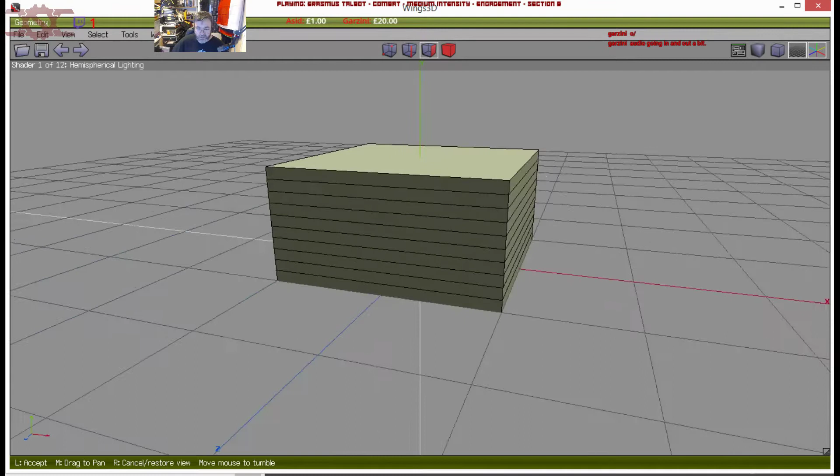Now, another thing to think of is, especially if you're using solid objects like this—if we undo those layers, I go back into the model and make it back into a cube.

So that's back into being a cube. For example, if you're wanting to use this basic cube model, you can make a 6-sided dice. To do that, make sure your block is solid, with no overhangs or edges on it. Something like a poker die is sharp-edged, sharp-cornered, and you don't have to make any modifications.

All you need to do is make your dice numbers. I'll show you that very quickly here. We'll just do a few cuts, then do circular eyes, and extrude that down. There you go - a very simple base for a die.

Now you can make it a little bit tidier. For the sake of this demonstration, I'll do this very quickly and explain what I'm doing in a second. So what you've got there is a tessellated and triangulated shape that will 3D print easily. Your hole is vertical, so you're okay with the way it prints.

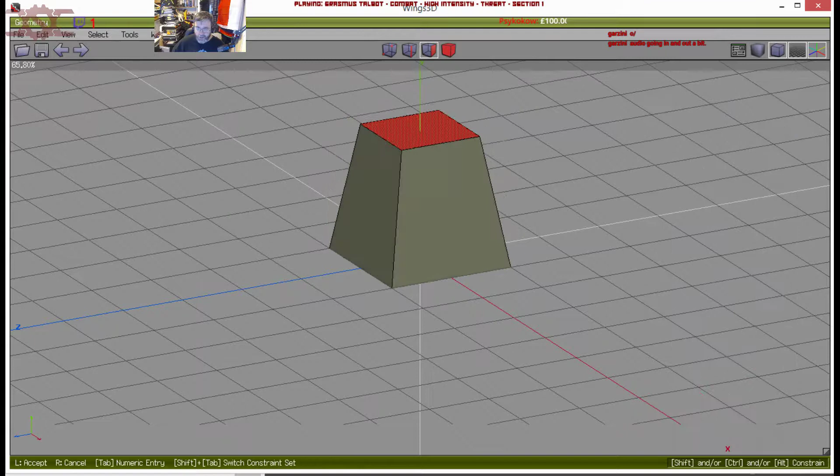So essentially what you're looking for is something that's going to print easily, with gravity helping it stick to the plates. If we have a look at easy to print shapes - if I scale that, that's easy to print because that shape is completely tapered, so each stack is smaller than the one below it.

However, that would be problematic because each layer actually sticks out a little over the edge of the first layer. So if I chop that up into sample layers, as you can see, you've got an overhang there. That's not exactly how it would print, because generally you'd get a stepped pyramid more than anything.

So it would go at right angles, because it can't print slants - you've got 0.2 millimeters, which is a very fine resolution. Because your splodgy layer is about 0.2 millimeters, the resolution of your actual print head movement is less than that, down to 0.01 millimeters. So you can overlay, meaning within each of these you'd have a very small overlap on each layer.

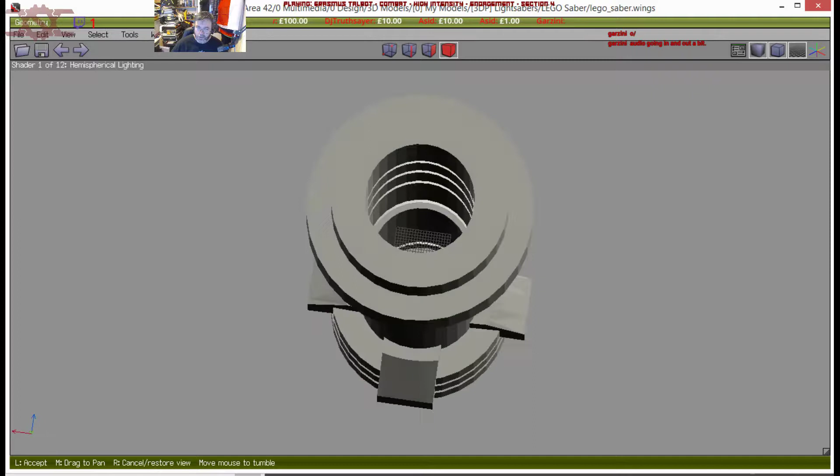I could load in a model I already have and show you how it works. So let's do that. Let's have a look at lightsabers, Lego saber. Okay, so that is the Lego lightsaber. Let me render that fully so you can see it.

That is rendered into many individual parts, so each of those is easy enough to print on its own. We have this part here, which is a hollow torus, a hollow cylinder - that'll print on its own. You then have a filled-in cylinder with a hole in the middle, also prints easily on its own. You have this bit, which will print easily on its own because it has the solid base around there. And you have all these different parts leading up to the top, so everything is stacked against each other.

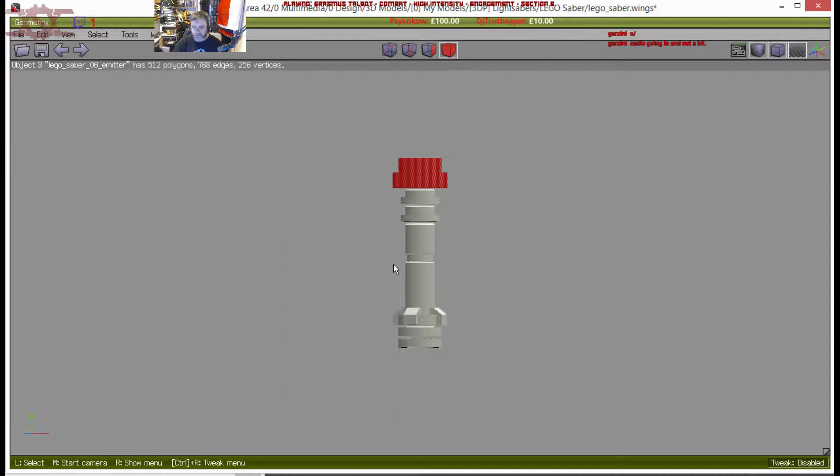If I was printing that all in one go, this bit here would overhang by a huge amount. There's a percentage of how much you can do - if you have a slope of 45 degrees or more, the printer will struggle. If your slope angle is 45 degrees or less, there's enough overlap in the plastic layers for it to dry quickly enough on the overhang, so it doesn't droop or get pulled down by gravity, because gravity isn't strong enough to drag down a 0.05 millimeter overhang on each layer.

As the layers go more at an angle, they have to be offset that little bit more. Look at where my fingers are in relation to each other there - let's use something, let's use phones. So there's 2 layers there, they would sit on top of each other.

If you have a small angle, say that's the cross section of the layer, essentially 0.2 millimeters, and that's 0.2 millimeters as well. As your slope increases, each layer as it's deposited will hang over further. Once you get to about a 45-degree angle, half of your layer is sitting on top of the layer below. The more it goes beyond that, the more it's liable to tip over, as you can see just with gravity here on the board. So that's what you have to be careful of.

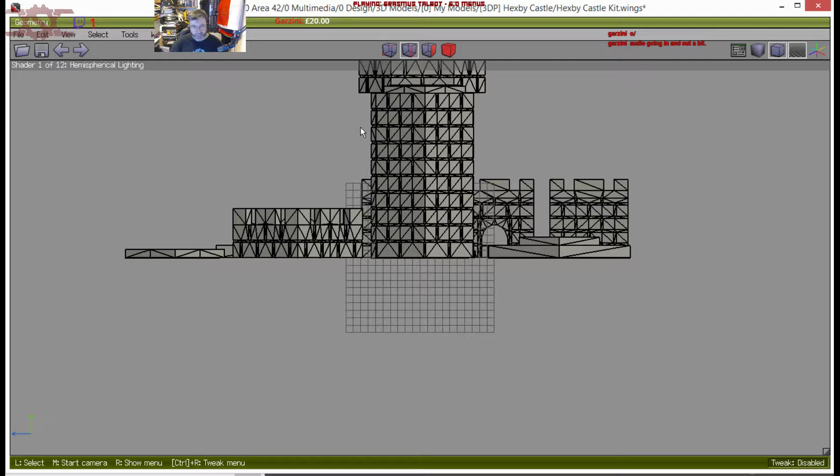I think that's right, 10 layers to get from that edge all the way out, and that's not going to hold up because it won't have anything to build on top of, so it'll just fall. You're basically printing into the air, and it'll be all horrible and stringy and hopeless. Hence why the model has been designed to print off like that, so all the larger pieces are on the ground or on the print plate.

No droopage, no overhangs, everything is okay on the vertical surface to print. Shall I have a look at something else?

Those are paper models.

This is basically an idea for a not particularly complex model. This is just a proof of concept, really.

There's fucking dogs going again, as always, every fucking night, all day today. They've been going on.

Bastards. Simple idea again, but this actually shows that you can actually print off separate model items.

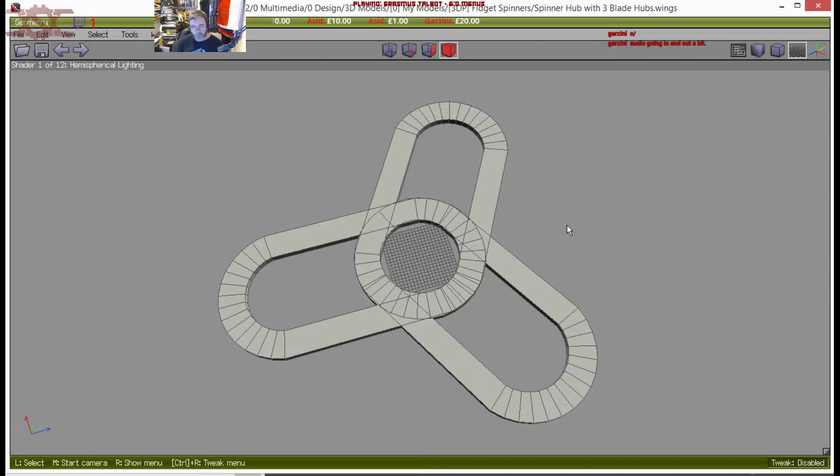When you're 3D printing, it's quicker and easier for the print processing to take a single model which has been combined, but you can, in theory, print off a model on the printer that is made up of lots of different objects. It will take longer for it to process how to cut them all into layers, which I'll show you shortly. But essentially you can do pretty much anything, it's pretty versatile, this 3D printing.

Lego pistol, that's something to know. Now this is a scaled up, 1-to-1 human version of a Lego pistol. So again, this illustrates how you can break up a model to print it off in easy sections.

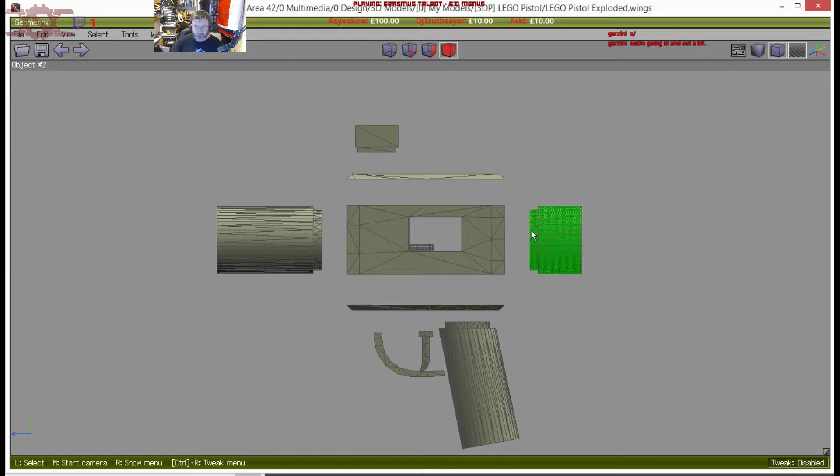So the whole model being put together would have hollow bits inside, it would have overhangs, these bits would all be stuck together, and you'd have so many vertical droppings, and also no way of standing it up. You turn it on its side, but then the cylinder is going to be lying on its side, and you'll have a flat spot at the bottom, like a tyre sitting on the ground, because you are obviously printing warm, hot plastic.

So breaking it up into these individual component parts means that you can import each individual part separately onto the print plate. You can even do loads at a time, or 1 or 2 at a time, depending on how large your print plate is and how big your parts are.

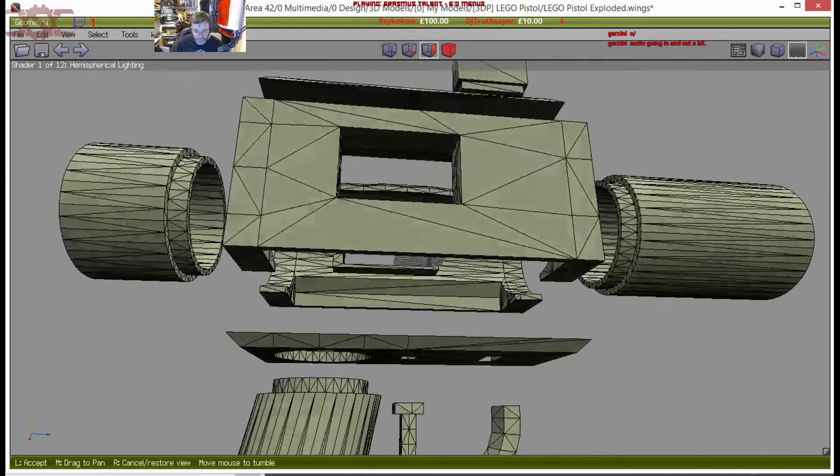Again, as you can see, each individual part there, that bit in the middle is just the print plate area. Each bit has been designed to be printed on. So the trigger part here, we print off with this bit at the bottom, that's the face that would sit on the print plate.

With this piece, it'd be this edge that would sit on the print plate. With this part, it's this bit that sits on the print plate.

But remember we talked earlier about the angles. That angle is less than 45 degrees, so it's enough to be able to print. Having said that, this bottom angle is also at an angle, so it's actually more or less straight, but you have an angle there as well.

So these bits, that bit and that bit, print off the same way, because you've got the angle sloping in towards the top. This one is printed the other way up, so it's printed upside down, with the angle the other way up. And obviously all the cylinders are printed on their end, end first.

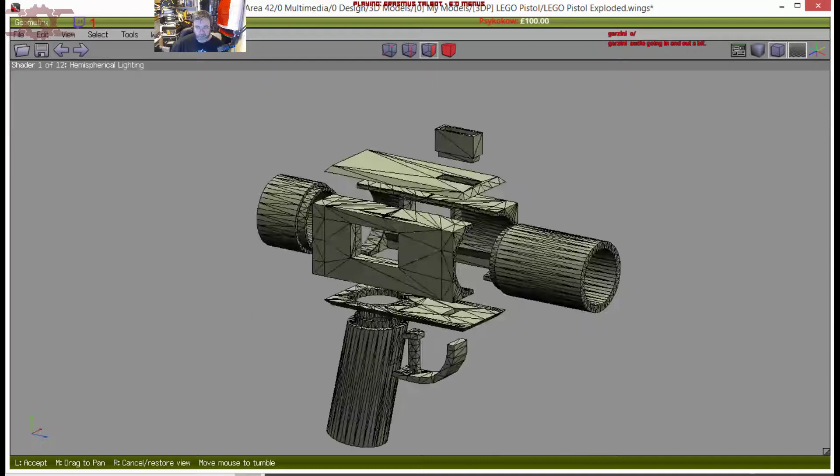These inner bits here have been designed so that they can be printed on this face, so that there are no vertical things there.

Now, you could in theory print some of this stuff normally as a single object by using supports. I'll show you supports hopefully a bit later on.

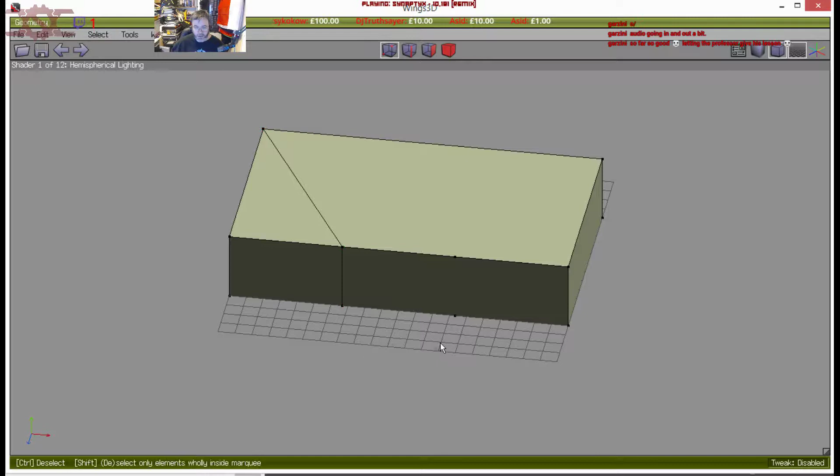We then have to grab those corners and join them all together. Pressing C once you've got dots or vertices selected joins them up like so. You can see our basic Sidewinder shape is starting to come out already. If I just delete those by pressing delete - oops.

Okay, that brings us down to there. Now, we know that the triangle from the front here goes to there. As you can see, we still haven't quite got the right ratio size per side. We're going to move that forward another bit - 3, that will look about right.

So then I'm going to select those edges and press 2 to chop that up. Then I'm going to pick these vertices there, which all need to join together. That will also put a cross up there, which I don't really want, but I'm going to do it anyway. So that joins all together, and I can select that and delete it. There we are - there's our initial look at this.

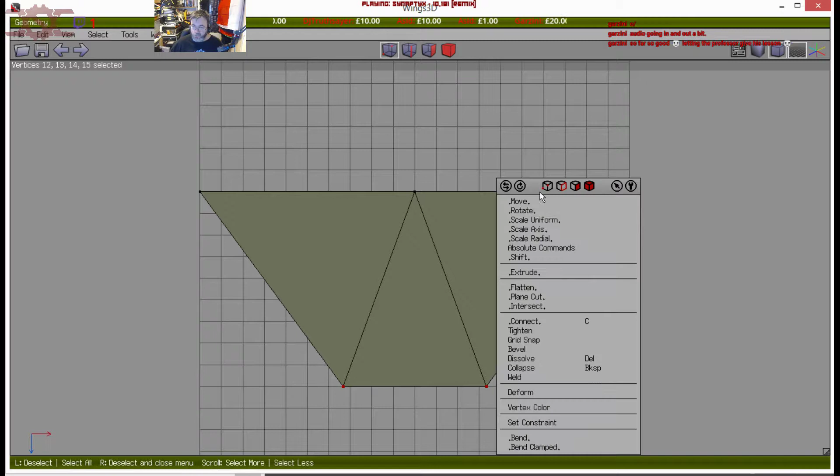I'm going to scale that across on the x-axis to try and equalize those triangles. More or less accurate, that's about right. What we're looking for is roughly 3 isosceles form. That's close enough.

Now from here, it's not that hard to actually turn it into a proper looking sidewinder. I'm just trying to get rid of that plate because all we need to do is bring that down into a slope there, and there, making the triangle that we all know and love. I'm going to do that by selecting all those vertices at the back and joining them together.

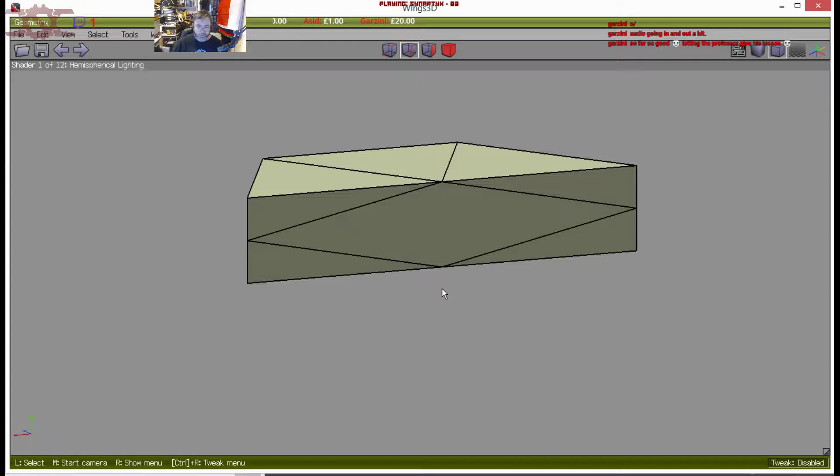And then I'm going to remove the inner part. So there you can see the back end of the Sidewinder. And again, remember this is the classic Sidewinder from Elite. So the old boxy triangle design that everyone kind of got used to.

Now what we need is that then to slope down to the front. We need to get rid of this vertex, these vertices here.

In 3D design, if you don't know, you have three types of objects you have to worry about. You have vertices, which are these dots on the corner, so where all these edges meet. You have edges, and you have faces. Now, each vertex is where edges join, and every face is made of at least three vertices. So triangulation is a big thing in 3D modeling, and this is no exception.

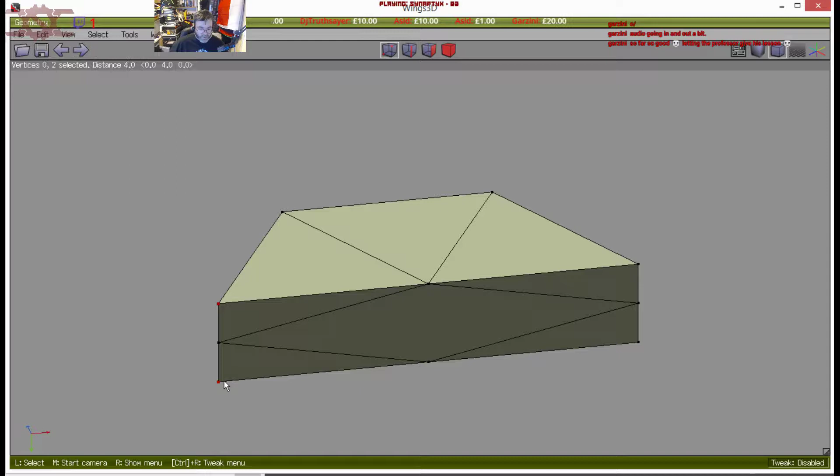As I said, we want to pick those vertices and then delete them. Now it's looking like a sidewinder, isn't it? So that brings us down there. So we need to get rid of that, and that. And then lo and behold, almost we have a sidewinder.

Now sometimes this application loses edges. So what you have to do is make sure you create the edges back again. And there you have it. There you have the original design Sidewinder. Six triangles stuck together with a triangle on the back. And I'll show you the inset.

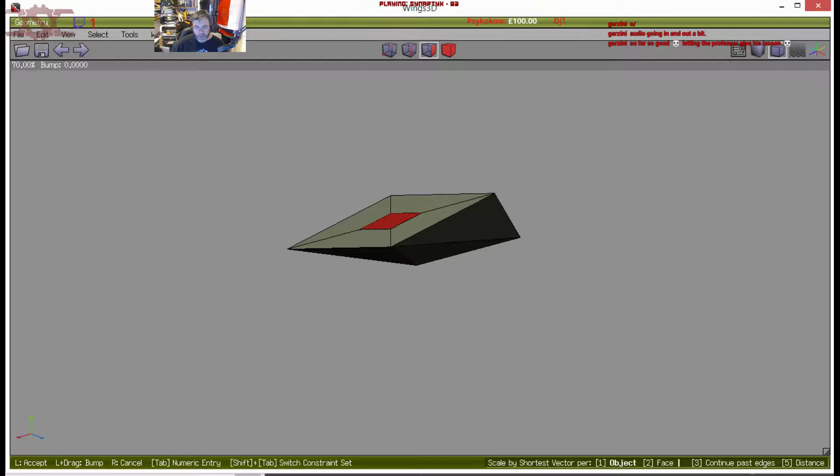But as you can see, the problem we have is that there are no supports under there. That's not going to sit because that's your print plate across this plane here. You can't print that because it's going to overhang too much. That will just drop onto the ground and it won't be very good. So we need to find some way of making that printable. So how do we make something like that easily printable in 3D?

So the easy way is to rotate it. I'm going to rotate it along the x-axis. I'm going to do it in this case around the center point of the draw, because it makes sure that it moves it properly.

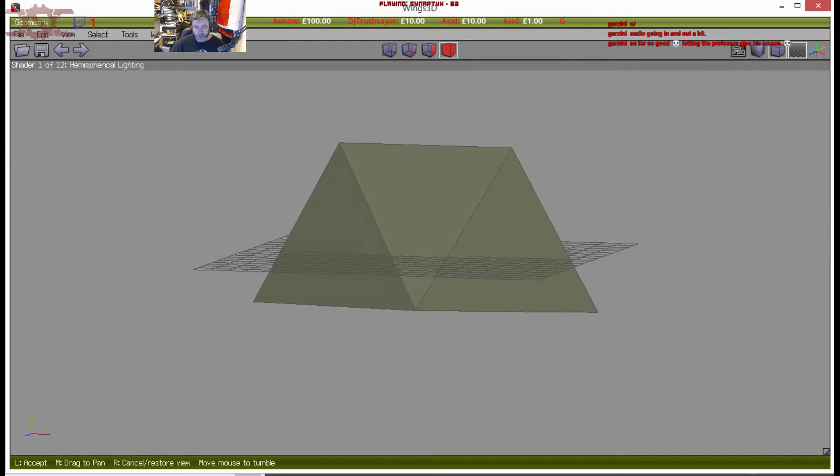Okay, so that moves that there. So now that puts it on its end, so that all the gravity is going to draw that bottom face onto the ground. So that all your weight is going to sit on top of that, and it's going to be nice and level.

So what I'm going to do here is just check that's at zero. So yeah, that's at -3. So what I need to do is move that up 3, so up 3 on the Y. And I'm just going to center it. So that centers it, that's putting it on the ground.

That's sitting properly on the print plate, and you can print that easy as pie. That's the easiest model you could ever wish to print.

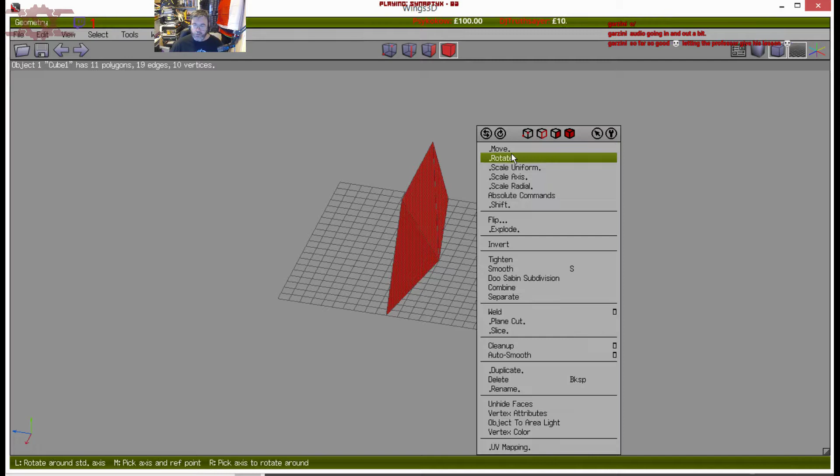Similarly, with the Cobra Mark III, you can do the same thing. So let's move that out of the way for a second. Let's hide it, select, hide select object. If we draw another cube, go through the same rigmarole again. I've moved it this time. Scale, radial, height.

Okay, that's approximately Cobra. So again, what we're looking at is making the shape of the ship that we all remember from our childhood. I'm going to chop that in the middle.

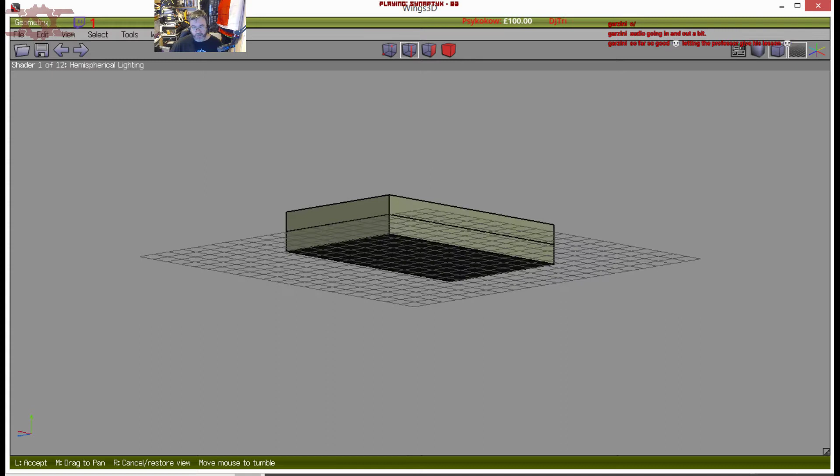I'm going to move that out of the way so we can see more clearly. We know that the good old Cobra has the triangle at the front. So again, that was just highlight all the edges and then press C to connect everything together on that middle layer.

And then we know we have the bottom edge. Again, we need to chop that in two. So we've got approximately this end. So we know that the front edge you have the triangle that goes there, and then you have the line back. So we know we have a center line at the front.

So select that and press 2, and that gives us our center divider. Now, we do know from the shape of the Cobra that this goes back about halfway. The triangle goes back to there, then to there, and we have a line that goes to the middle point that we created earlier. So in order to create that center line, we'll select those two.

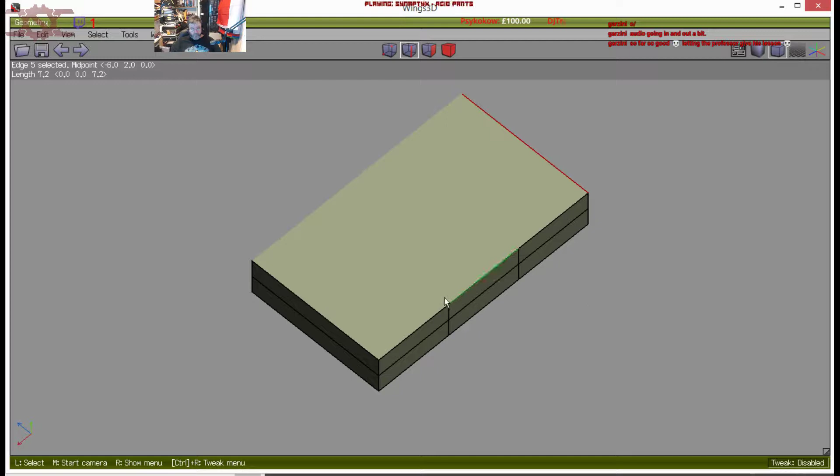As you can see, they're both selected in red, and then connect them. That brings us our midpoint, and then we can press 2 to give us a central point there. So with that, if we join those two together, and then we join that to there, you can see the shape of the Cobra starting to come out.

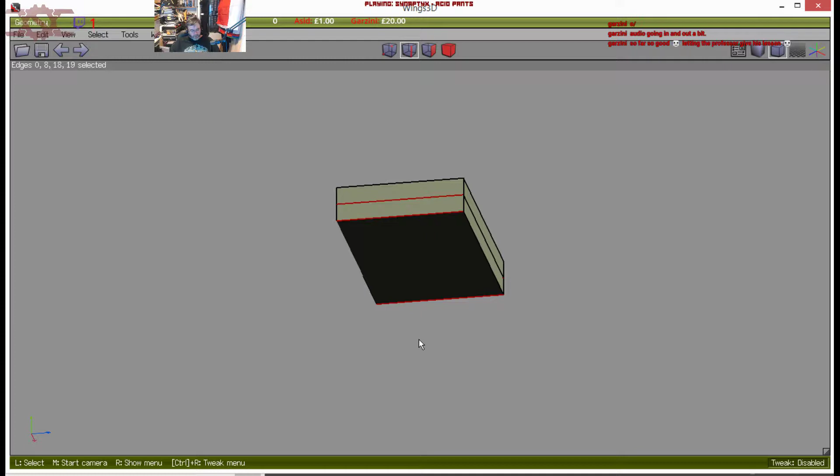Now, these two dots are now not quite right. So we know we have to kind of mirror what's happening all the way through the rest of the shape. So we'll chop those in two as well and connect them for now. I want to get rid of that.

And what we want to do is move those back a little. We'll put them back there.

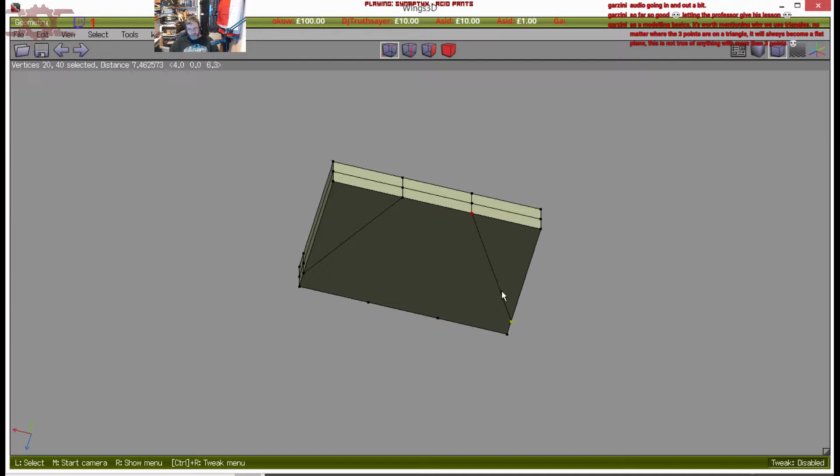So as you can see, we've got the approximate shape of the top of the Cobra coming out there. We know there's a slope there, so let's put that slope in. And we have the same slope there as well on the side of the shape. Joining all these lines together gives us the rough idea what the shape is going to look like.

Okay. Start to see the shape coming out there. That's fine.

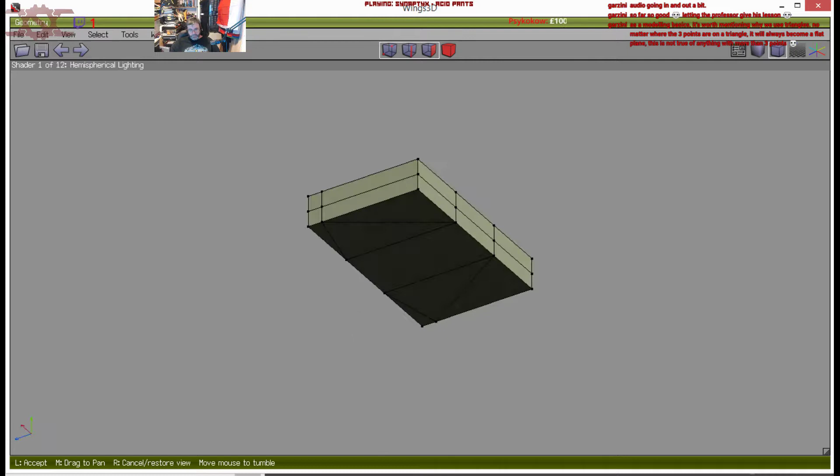That's correct. That's exactly right, garzini. Glad somebody's here, to be honest. Fine, nip them out of the way.

That gives us approximately our Cobra shape.

3 points on a triangle is also why most of the Elite ships were triangles in the first place. It's much easier to render a triangle than just to render around, because you have to make sure it's just the minimum amount of points and the minimum amount of edges that have to be calculated in 3D space, he says.

So let's try making the Cobra shape. We'll pull that down there. We'll pull that way. Also, what I'm doing there is I'm making multiple cuts, and then I'm just going to keep the ones I want to keep.

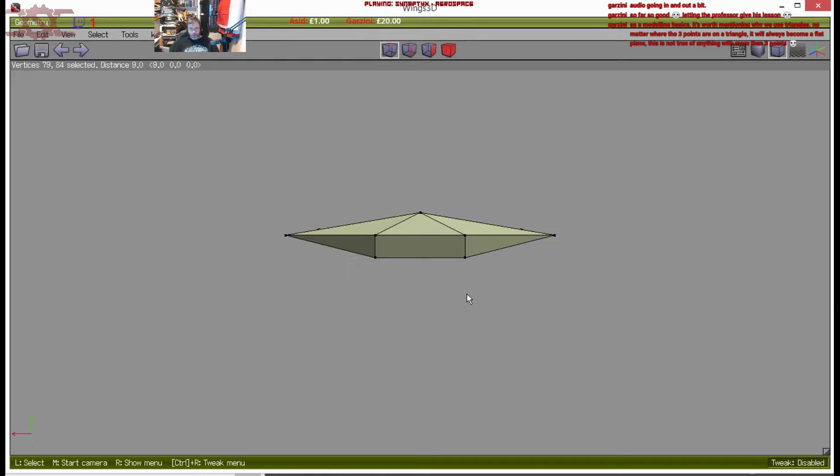So those. There's your Cobra shape. We'll just join those last two together. There's your Cobra.

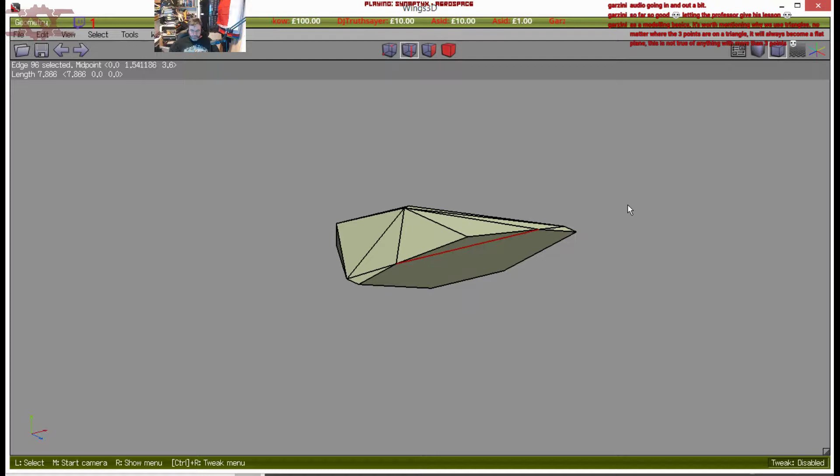Make it right. Okay, so that's roughly what your Cobra looks like. There you go, one Cobra.

There you go. An approximate Cobra shape. It's not perfect. It's not 100% canon, but that's roughly what it looks like.

So again, we're looking at this and we're seeing we have this overhang here. But again, with this model, it's easy. We have a flat plane on the back there, so we can do the same as we did with the Cobra, the Sidewinder, and we can rotate it

on the x-axis, 90 degrees. I'm going to do that on that. So rotate x, middle button is the origin point. Okay.

Now as you can see, that's actually not quite that. That's actually gone a bit further down than what I intended because I rescaled it. So you can make it get it as close as you can.

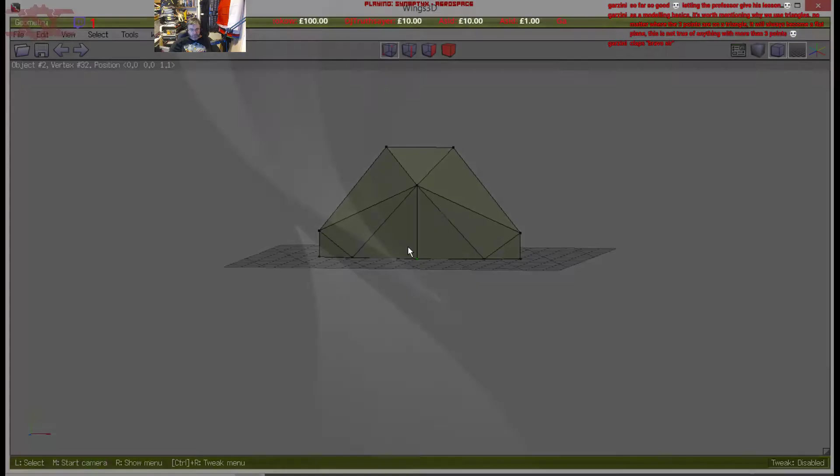Other way you could do that with this one, is you can use this edge, this long edge, if you're flat. But again, you've got this overhang here. It's going to cause you problems.

So having that back edge is what you would need. But the other thing you can do is you can split the model up. And principally, say you've got a model that isn't easily laid down on a flat edge, as easy as this model is. So say you don't have that back edge.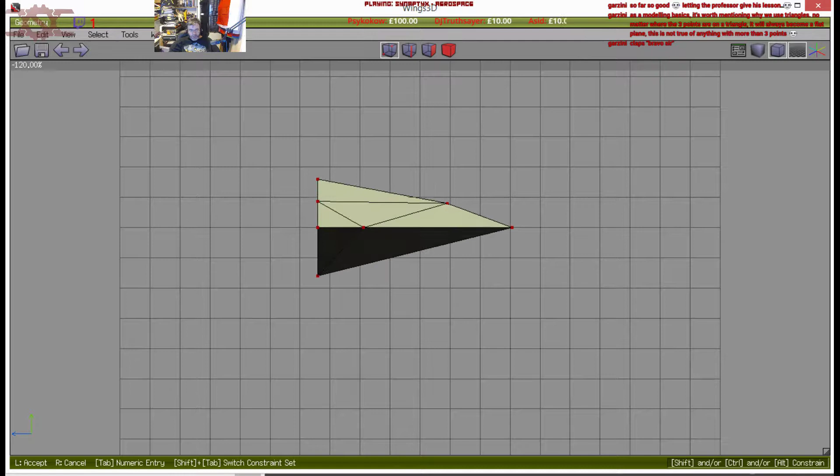Let's create a brand new shape by morphing this, if I can remember how. Use the points, form, taper on Z. Deform, taper, okay, so now we have a shape that doesn't have any flat area.

So this is the Cobra Mark 5. No flat area at all that would allow you to set it down and print it. So what can you do? What can you do in this kind of situation?

Well, let's do something else a bit weird as well. Make it all kinds of fun. The smoothing thing in wings isn't good.

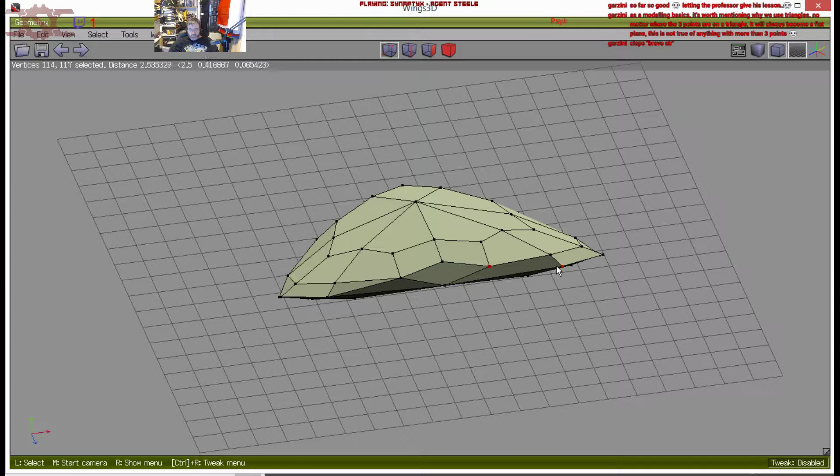As you can see, that is a model that is not going to sit happily on anyone's print bed. But what we can do...

Grumtastic! Hello! How are you doing, sir? Thank you for watching. So what can we do with it?

Whereas before we had a load of triangles, this doesn't have triangles. So what I'll show you now is how to get around some of the problems we have with the render and the shape of the object and how to print it. As Garzini mentioned earlier, 3 points in a triangle give a flat plane. Everything has to be in a flat plane.

If you're trying to print something off in the real world, you'll want as simple an option as you can get. Each time the print slicer tries to calculate how to print the shape off, it has to calculate all of the edges, vertices and faces and make sure where they are in relation to each other. If the model itself has already been triangulated and each face is a triangle, it saves a hell of a lot.

We can do that in Wings with most other projects as well, by going to the right click menu, tessellate, triangle. Now that sorts all of your things into triangles. So everything now is a triangle.

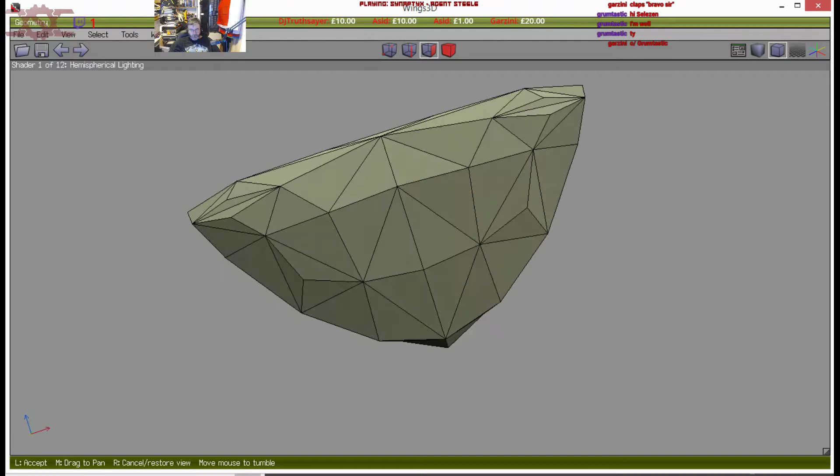Sometimes it doesn't do it particularly logically. For example, that line there, I wouldn't put because that makes a recess. I prefer to have it sticky out. So that makes it slightly better. Again, there - that'll be difficult to print in anyway.

So a lot of this comes down to your eyes as well. What do you think would be easy to print? How do you think it should look? What makes it more obvious to you? To me, that actually looks like it should be there. The smoothing has not done a good job of making that, so that seems that much. And again, I'd say the same there. Look at that - that's what they did before.

Those and that are extraneous. That and that don't really need them. Down here we've got that one and that one, that one. A bit of clean up, just make it look a bit more sensible.

And again, you can tessellate yourself manually by doing all that. There you go - that looks like a reasonable model.

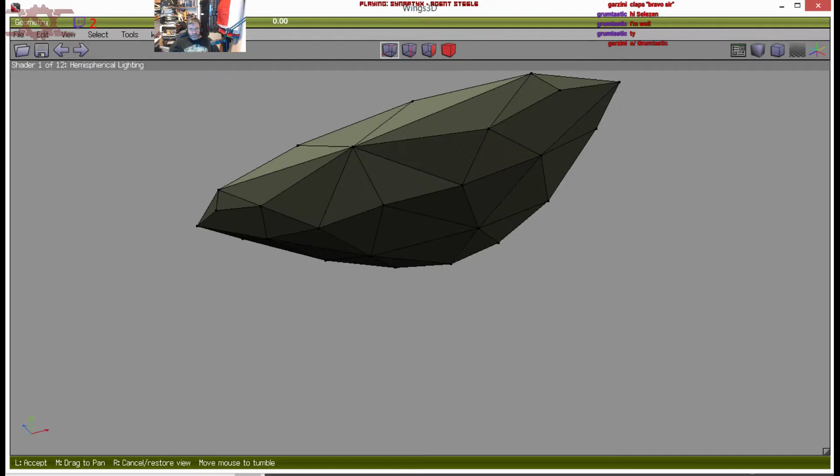Now that, as I said, will not 3D print particularly well. There are no flat surfaces. There's no way you can sit it on its end and print it off on a print bed. It will not lie flat. It's not looking great at all. So what you can do is use supports.

Now what I'll do is I'm going to save that one. No, it's a broken Cobra Grumtastic.

So I'm going to go into my model. I'm going to go to new folder. Eventually, 3DP Printing Tutorial. So that saves that model as... we'll come back to that later.

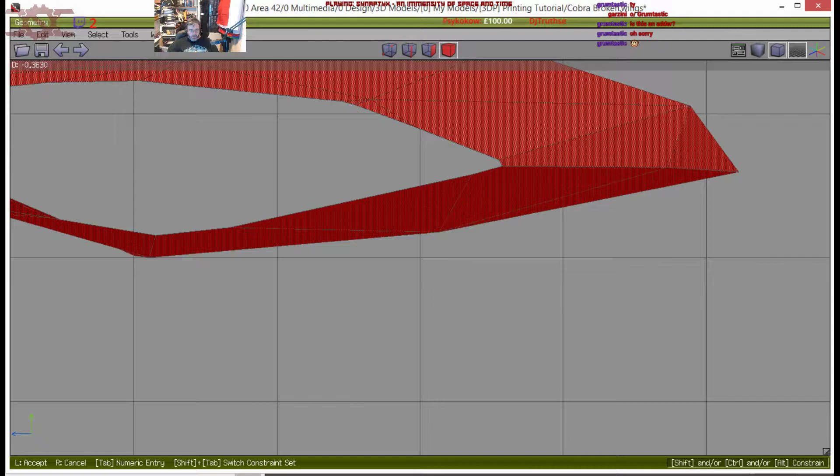Now we can print that off by using supports. What supports will do - we bring back our plate again. See, this is your side view, so this is your bottom face. Move that, just put it there. What supports will do is they will actually take that model...

They will add a supporting brace across all of the overhang bits. So all those bits under there will have a support made of plastic, and obviously all those overhangs here. That bit will sit flat on the ground, and these bits will have supports underneath them that you can then break off or melt off. Supports are tricky, so you have to have them set exactly right or they won't work.

But what we can do - what I'm going to do is I'm going to actually export them. So I'm going to export, and I'll show you. This is how you do the 3D object print off on a 3D printer.

The Wings format, where you've got Cobra broken.wings, that is a proprietary format. The OBJ, or object format, is one that is used by default everywhere. It's just a text file that can be interpreted by a lot of different things. Printers use G-code - 3D printers use G-code - and they can convert an OBJ file into G-code very easily.

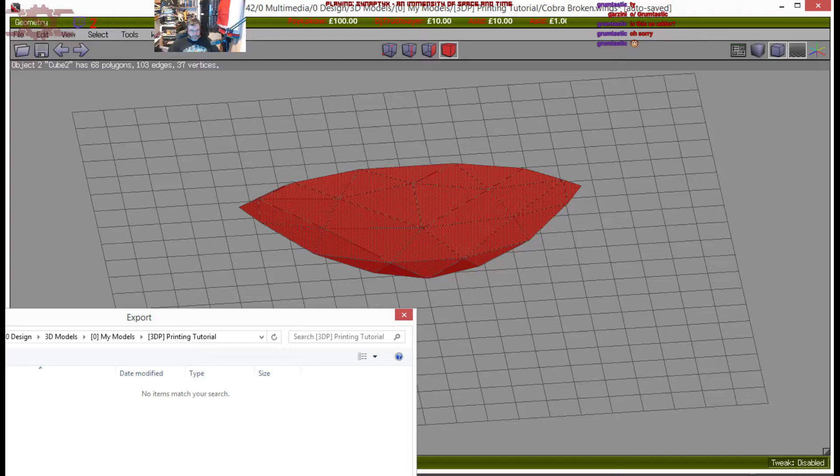So what we have to do is export selected, which will export it on the flat plane anyway, in wavefront OBJ, Cobra broken. Okay, that's that. So if we wanted to use another method...

We can go down the route of trying to chop this up into something that's 3D printable. Now the easy option here is to cut it down along a line in half. We can do that at the centre line quite easily. If I grab the obvious places - we have a dot at the end, we have a vertex there, a vertex there, and on the underside we have the same, some vertices across the front. What we need to do is make a break here, here, and here.

Now that's all the bits we need to break in order to have a centre line we can use. So if I chop them by pressing 2, you can see they're all broken. I then click on the vertex and join it there, and then do that. Then you can see we have a centre line.

Now I can use select one line on one edge, and then press L, and it will loop all the way around. That's what's called a loop, and it's created a loop. Now what we can do then is do a loop cut. So if I then go to that, we now have two separate objects.

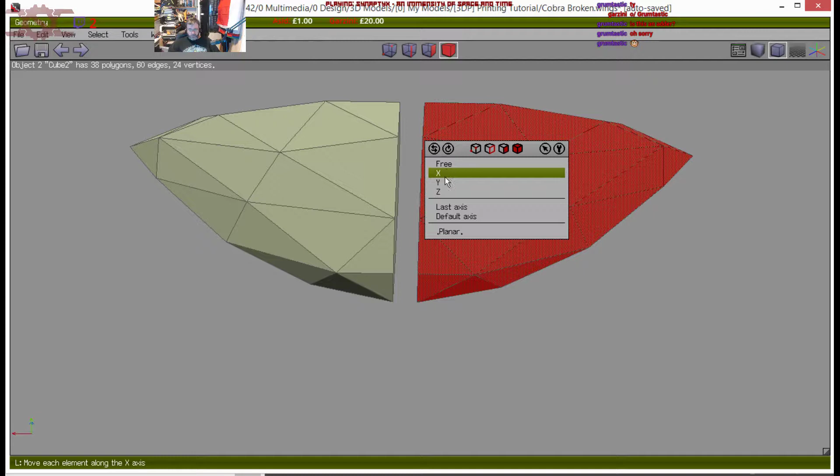What I'll do is I'll move them forward slightly across on the X. This will let you see in between each object. So there you go, completely flat clip, which you can then tessellate.

Right, that's that now tessellated, ready to print. So what we can do is we will rotate them around on the Z axis.

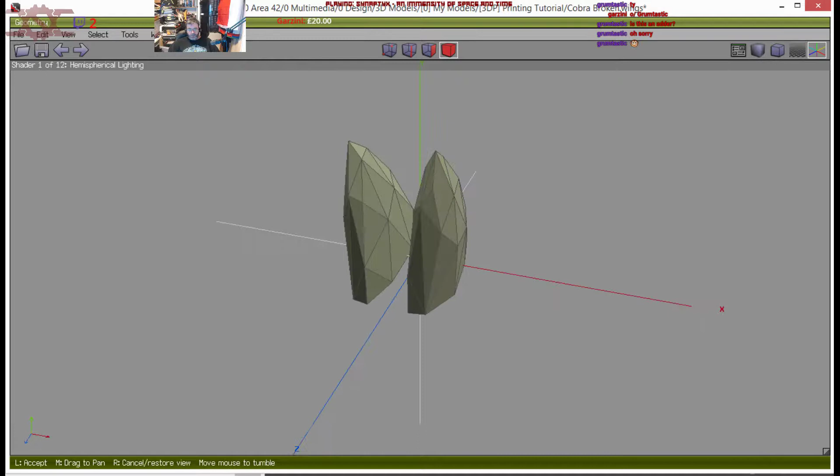Remember again, we need to put them on the baseline. Right, there's our two halves of shape. Deselect them. We can now print them off.

And we could, in fact, print them off together and stick them together. So if I select them both, export selected, wavefront, Cobra broken halves, OBJs. There we go. Right, so that you can print them off because they will both sit on the print bed, and we can print them off at the same time.

And they will build the same model that we would have with the other. See, that's what Garzini said as well.

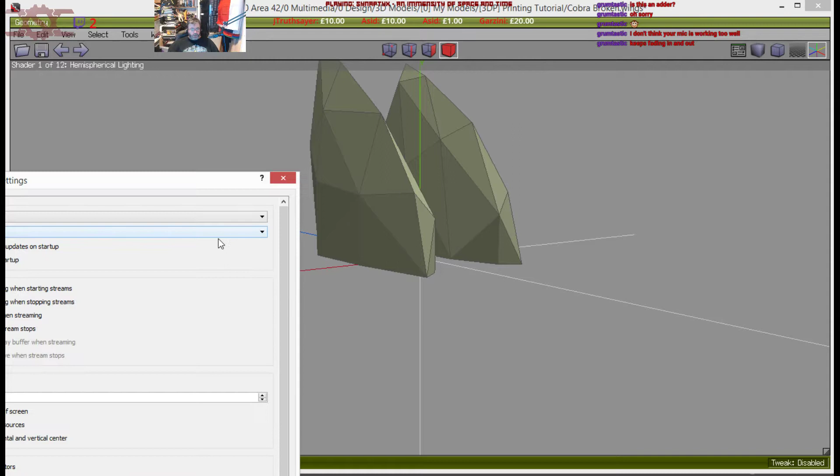I'll tell you what I'll do. Tell you what, hang on. Let's skip all the fancy stuff we're trying to do. So I'm going to go there, and then go there, apply.

Is that better? I should keep it a little more constant now. I'm using a voice filter. Obviously I need to do some more setup on it to make it pick me up a little better, but we'll sort that out next time. I'll just close that up. I'm not going to use it for the rest of the thing anyway. That should be okay now.

Okay, so that's that. So let's hope that we can now go. I'm going to undo everything I've just done. Take it back to the original Cobra model. Not enough undo steps. That's bloody typical.

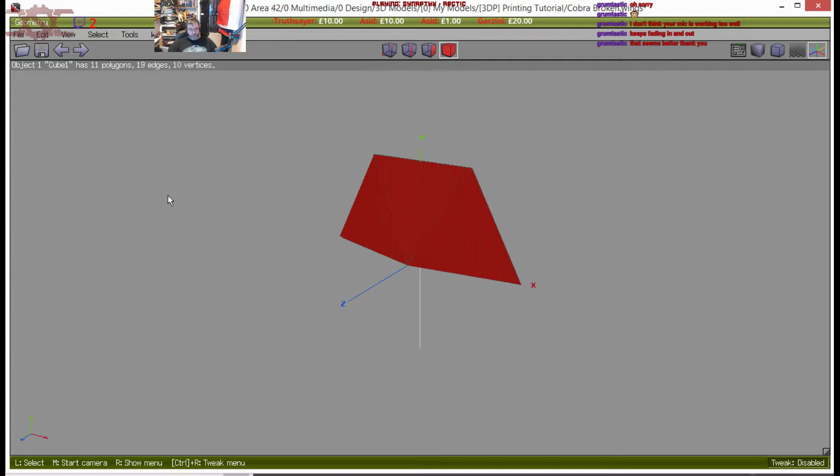But anyway, we don't really need that. I'm going to get rid of that, and we'll bring back the Sidewinder. So let's bring back the Sidewinder. Select, unhide all objects. So there's our Sidewinder that we had earlier in the show.

Now we can just export that, and that'll print off exactly as it should be on that angle. So I'm going to select that, export selected, wavefront, Sidewinder.

Now you can do anything you like to that model, as long as you don't screw up that back edge, and you can make it as detailed as you want to make it. Now I would quite like, for example, to do some of the cool stuff that they did with the new Sidewinder, so I am gonna

Muck about a little bit with it and make it cool. Do do do do do do do do.

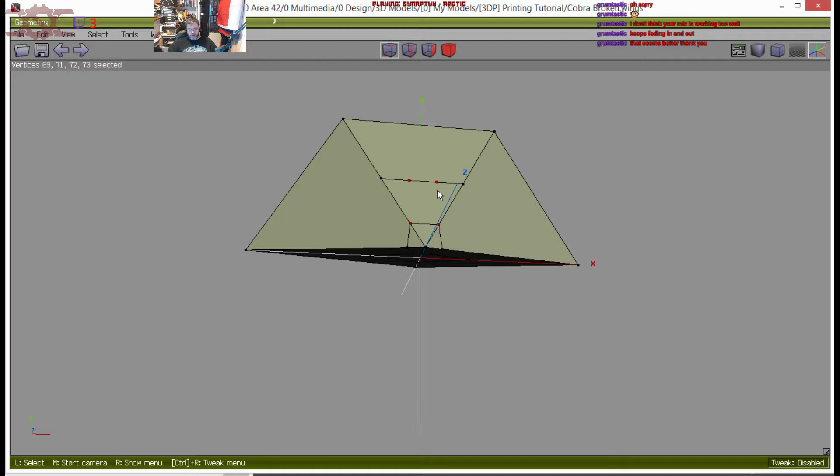Flatten Z. Move Y. Oops, nope. Move Z.

So you can make a pretty cool looking shape just by mucking about with a few of the basic shapes that you can have in these things. So I'm going to grab them as well, get rid of them.

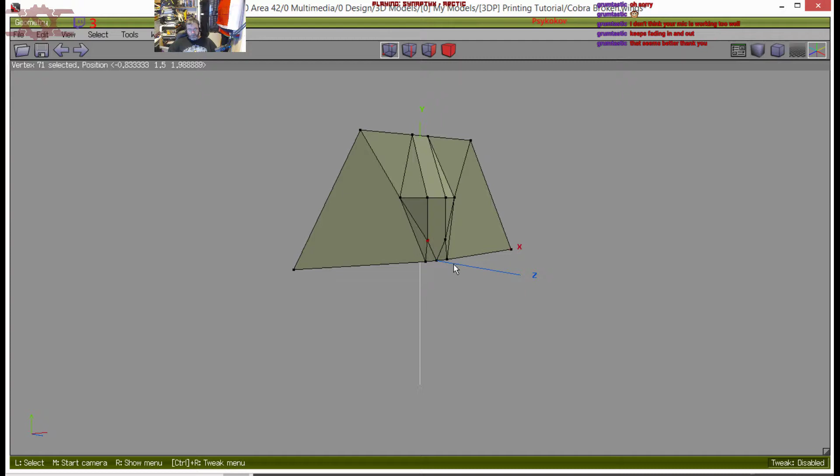There you go, slightly more up-to-date Sidewinder. I quite like that. Huh. What do you know? What you can do is just a bit of faffing about.

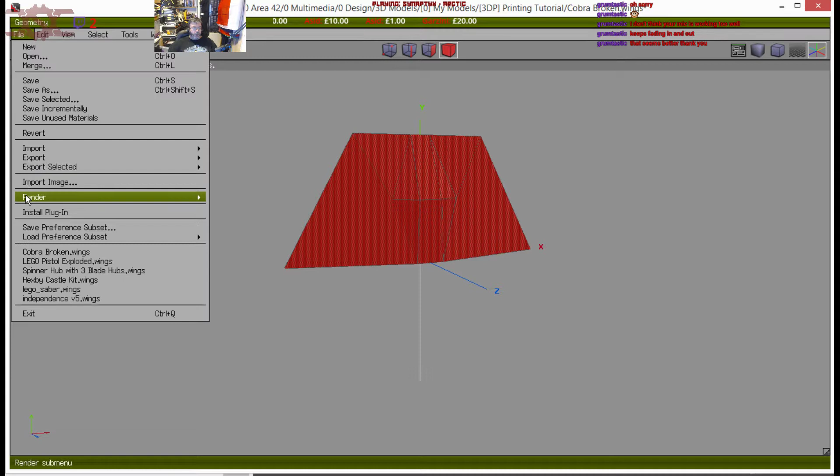Right, so let's export that model. Let's export selected. Sidewinder modified. But again, we've done all that modification, all that mucking about, but retained that flat back edge so that we still retain our ability to print that in one block. Okay, so we have that.

Right, so next stage is we take a look at what we can do with this bit of software. Now this is MatterControl. The printer I have is the Vector 3 printer, which came as a magazine gift. Not a gift as such, but a thing.

Grab the camera and let you see it a bit more fully. Try and point it in the right place. That's it there, that white thing next to the halo. This.

That's the printer. You've probably seen it before in a few of the other things I've done. But if you want to look it up, have a look for the Vector 3 3D printer.

Online it'll show you. It was an Eaglemoss partwork series that came out over a couple of years, ending up being roughly 700 quid to buy, which is what 3D printers retailed for at the time. They've since come down a hell of a lot, but at the time 700 quid was about average for a decent home 3D printer.

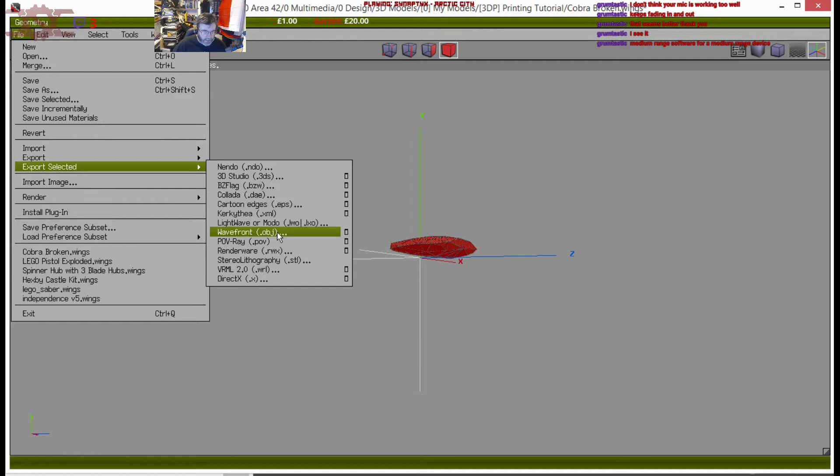Oh hell, I used the wrong format. It's not OBJ, it's STL that you need. Export selected, stereolithography, Sidewinder, save. If I hide that, file, import OBJ, bring in the visual sidewinder, select it, export selected, stereolithography, save, delete, file, import OBJ, Cobra broken, file, export selected, stereolithography, save, file, import Cobra broken halves, export selected, stereolithography, Cobra broken halves, save.

Medium range software, medium range device. Yeah, pretty much, it's mediocre software for a half decent printer. It's not a bad printer. For essentially paying 10 quid a month for 2 years and then building it myself, it's bloody good, especially given the fact that I did build it myself.

Okay, so that's fixed that again. Right, let's go back into thingy now. So there we go, we have it there now. Let's load up our Sidewinder.

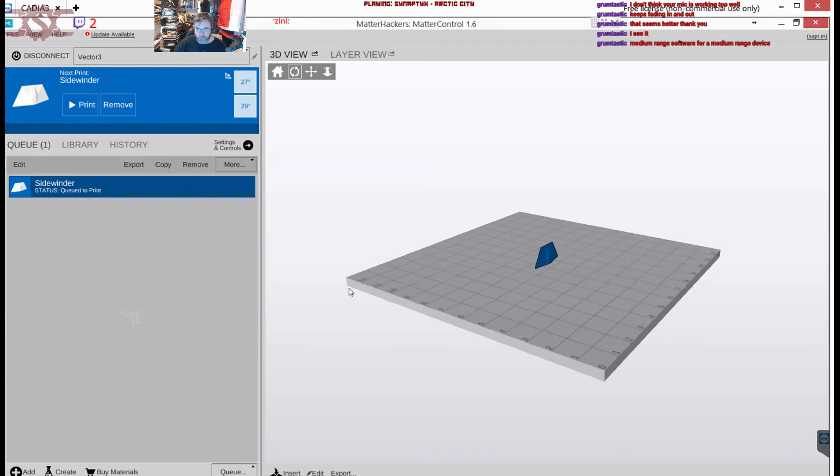The jerkiness on the screen, by the way, isn't anything to do with the driver. It's to do with the way I'm linking to this application. Okay, so we can use that software to scoot around the model, and there we have it.

Right, that's it sitting on the print plate. This is a rendering of the print plate on my printer, which is 12 by 12 centimeters, and as you can see that model is about 2 centimeters across, roughly, which is what I said it was at the start of the thing.

And that's how it'll print off. That's the orientation, so that's all right. So what we need to do is look at how to break it up and how to print it off.

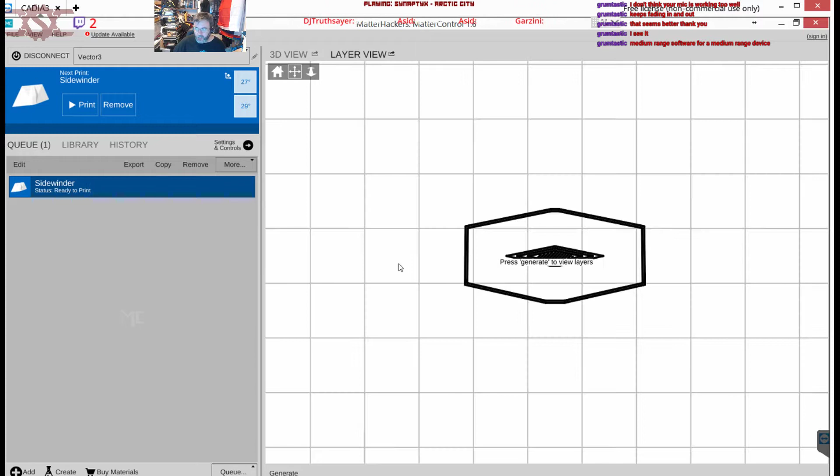Now we can look at the layer view and generate. What that'll do is use the pre-generated options to break it into layers. That will show you how it works. Around there you've got 2 lines, those are your lines of plastic. And as you can see, there's your first layer of the actual model.

Now those are rendered completely as blobs of plastic, but in the real world your hot plastic will melt down and be slightly less round than that. It won't be - if it is that round, then your print plate is too cold. Using this software, which you can't do with the software that came with it, you can build up the layers on screen and see how it goes together.

So you can see what I mean about how your layers stack on top of each other. If I zoom in a bit, you can see that incremental stepping. This was right at the very start of the video, Grumtastic, so you missed that bit, I'm afraid. But you've got the incremental step in there to show you where each layer of plastic sits on top of the previous one.

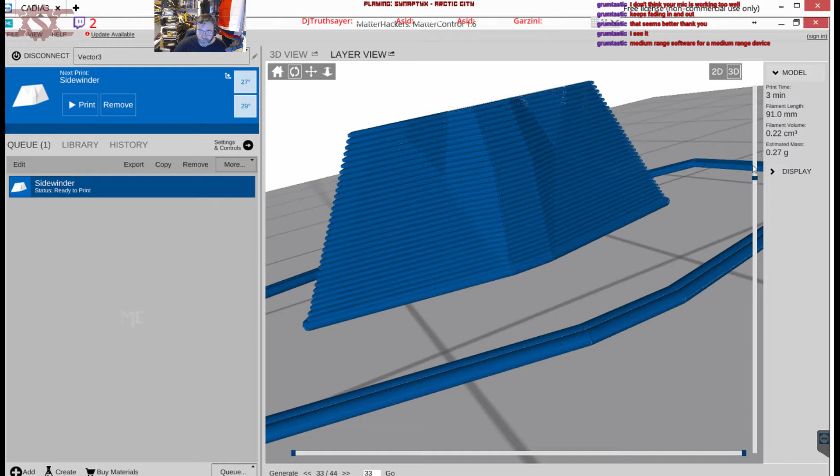Actually doesn't look right. What the hell is going on there? Import STL Sidewinder.

Oh, that's a bizarre thing. Yeah, so for some reason it's got a bit of a pop out at the top there, which is odd. Shouldn't be doing that. That might be an import error due to the size. And this is what I mean about the way that sometimes these things work. You've got to think it through about your size, your scaling, your options. Now, that could be some points that have gone rogue.

Why is there an outside surround? That's called the skirt. What that does, it allows your 3D printer to prime itself. So before going straight into the print, you have to make sure that your nozzle's unblocked, that your plastic is flowing freely, and there's no snags in it. So what that does is that essentially generates a way of priming your nozzle. Clear any blockages, let you test that everything's working okay, and then it lets you go straight into hot plastic coming down onto the print bed.

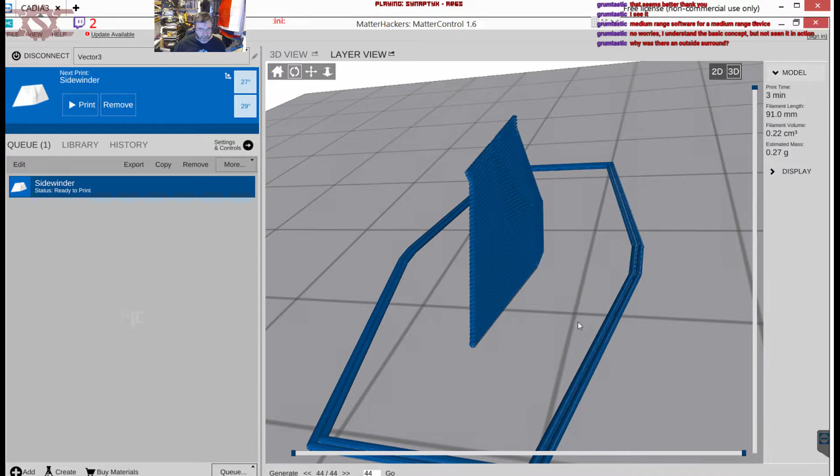It's always advisable to do that. It also delineates the print area to make sure that nothing else gets in that print area, and there's enough clearance to get your head down and up.

Okay, so let's get rid of that just now and bring in another one. So let's bring in our broken Cobra and let's have a look at the ideas for supports. Now this may not work too well because of the scale. So what I'm going to do is I'm going to modify. No, I can't, where's my modify? Edit. I'm going to scale that model up.

So I'm going to change that to 6 times the size. Yeah, there we go. Nope, don't move it. And we will save that. So all that saves us a temporary file in the same folder as where this is saved. So that has now changed the scale of that model up by a shed load.

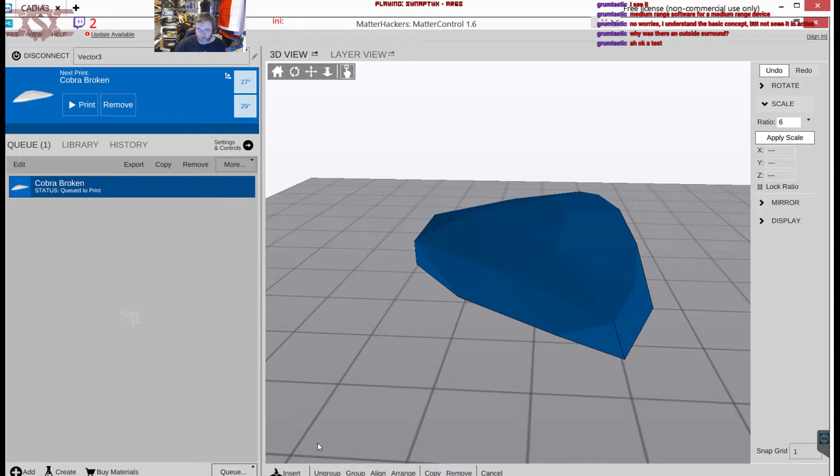Okay, so that's a lot bigger than it was. As you can see, it hasn't been overly happy with the way that it's been spliced there, so it's got a little bit of overhang. But as you can see, we need to try and sort something out about this overhang here, so that it doesn't actually just collapse onto the thing.

So what we can do is we can use our settings. So we've got settings and controls and support material. Now at the moment, generate support material is off, so I'm going to switch that on.

Support type is lines. Now you can change that to a grid, so instead of just doing vertical lines, so lines of plastic that will hold it up, or you can have a grid, so it'll do a grid pattern underneath it to hold it up. Both work just as well, depending on how you set the spacing. I have never got this to work right, but the principle is visible there.

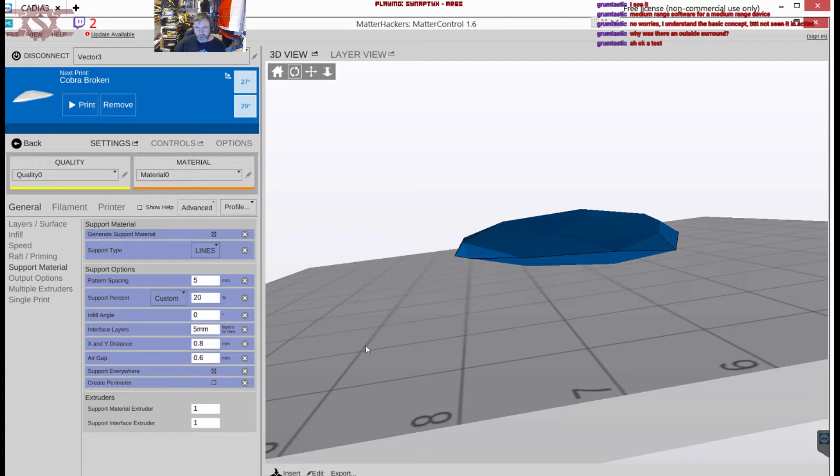So I've put that on. Pattern spacing, all those things are different things. The air gap is what's intended to be there so that you can easily break it off. So once it's all dry, just you can snap them off, and that in theory works. Okay, so let's go there. Let's go to layer view and then click generate.

And there you go. So there's our model. Now, this is the model. This is the support. So you can see what I mean by using a lot of plastic. So if I grab that up, and as you can see it's starting to grow, your lines here are what are delineating your actual ship outline. All this stuff is support plastic.

I'll go up through the model. As you can see, I'll tilt that round so you can see it. As you can see, all that is support. So that's very dense support in there. Now you can change that.

Pattern spacing, let's see, 10mm, support percent. Leave that as it is. Increase there, X and Y distance. Let's see, 2mm. Don't take that. And then we'll generate again.

Right, and as you can see there, that's more spread out. Not by much, admittedly, but we'll see. So again, our support material will build up to get to the edges of the model. Our model is then built up from there.

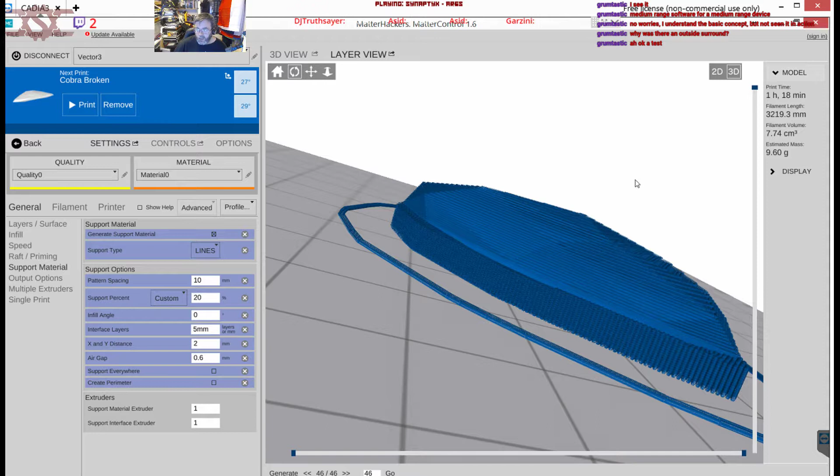Now, it looks a lot worse when you look at the lines on there because they're actually rendered for clarity than it does in the actual model when it's printed. You can still see those lines when they print off, but you can sand them down. There they look like sausages sitting on top of a plate. Pattern spacing, 20mm.

Do that as a grid, and I'll let you see that as well. It doesn't actually look all that much different, does it? But anyway.

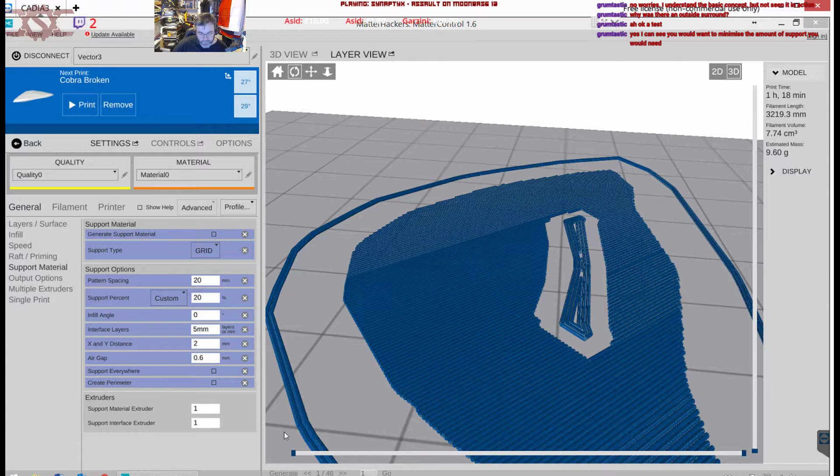So yeah, what you're trying to do essentially is use as little plastic as you can to get as much support as you can. I'm just going to take that support material off and then generate it again, so you can see the difference. So there's your outline. That outline is only really across where it hits the actual board, and then you're going up from there.

Now, as I was saying earlier, there's an infill. This is infill here. This hexagonal pattern on the inside of the model is your infill. What it's intended to do is save you plastic on models, so rather than filling up the entire model with plastic, you can put a pattern inside it to stop that.

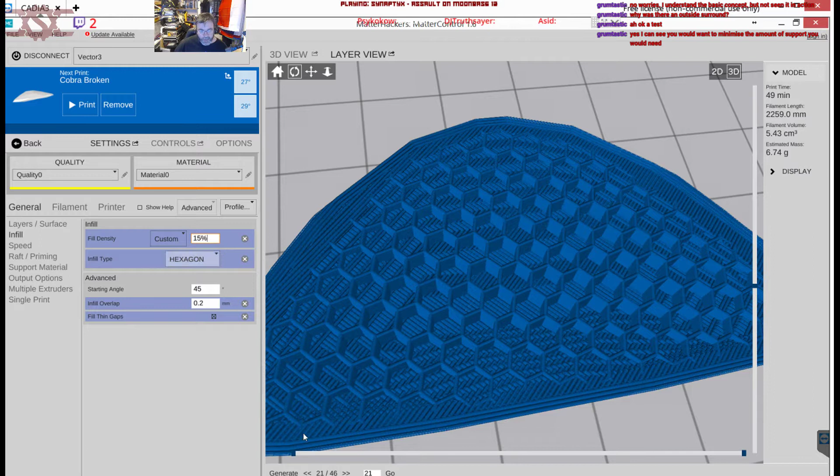Density there is 25%. If I say 15% and then regenerate, you'll see these hexagons get bigger. Let's go back onto there and see it again. As you can see, much bigger hexagons, much more space inside.

Now for something like this, which is essentially going to be a fairly small model that's not going to get particularly heavy handling, a percentage like 10 to 15% is fine. It's sealed in, it's not going to be a load bearing structure, it's not going to be used as a lever or anything like that, so 15% is fine. If you're going to use something like this for printing off box cutters or something that's going to support something, or you're going to print off a new stand for your chair, then 100% fill is what you need.

And as you can see, with these settings on, you have all these settings up here. What they tell you is exactly what's going to happen when you print it, so how much filament you'll need and how long it's going to take. That's your main two things.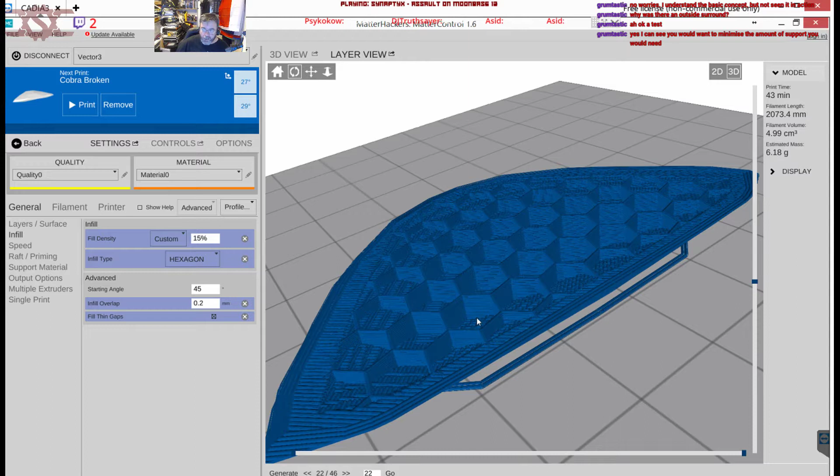So the filament length there is 2 meters, and the estimated mass of it is 6 grams, so that's 6 grams of plastic will go into that. The drum on the back of my printer at the moment is a 1 kilo drum. So that model is going to be about 6 centimeters wide, and about 4 deep, and it's going to be 6 grams of a kilo.

So that's pretty good. If we go back and put that support material on, by the way, and then generate that again, watch that number there increase, and the print time. So that's now taken half an hour longer, an extra meter of filament, and 3 more grams with all that material on there.

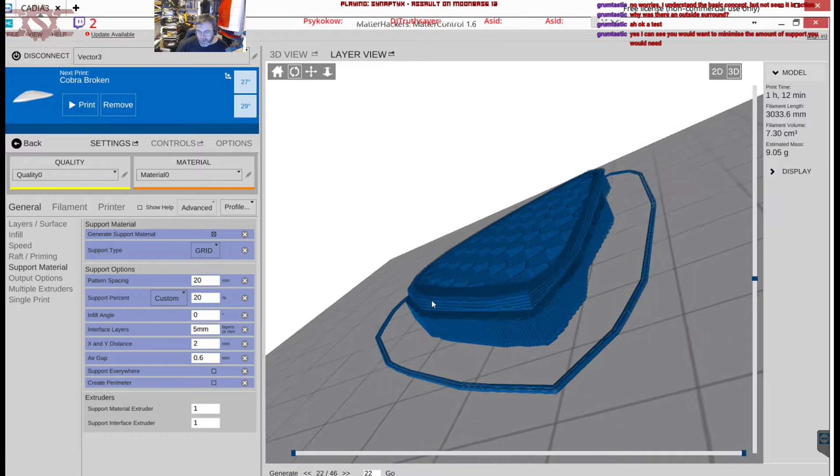Obviously I've selected a grid support type and it's not actually doing it as a grid, it's still doing it as that. Never mind. Anyway, so there you go. That's pretty much the main thing about how to print off something with support. As I said, support I've never really got working properly, it's not something I've managed to actually get right yet.

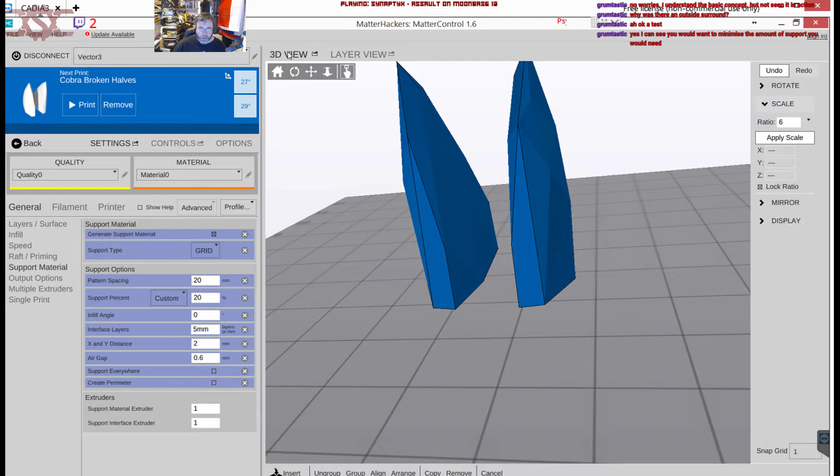So let's add another model. Let's put the broken halves on. Rather than using the support idea this time, we're printing off as 2 separate halves of a model. Now let's again edit that and scale it up to 6. Save that. So that is the same model but printed with a vertical shape with your flatter surface on the bottom. Okay, as you can see, same shape, same shape. All you'll have to do is print it off and glue it together in the middle somehow.

Now, gluing a model is actually a whole different trick in itself. There's not many of your average standard kinds of glue that work well with PLA plastic. Polylactic acid - it's essentially sugar, a carbohydrate, organic, I think decomposable plastic. It comes in reels, can be printed off into anything you like. It's fairly lightweight, quite soft in comparison to Lego, which is ABS, for example. It's quite light, and I do believe it's biodegradable.

The interesting thing about it is if you burn it, which I have tried to do, it actually smells like caramelized sugar. So to me that would indicate that the easy way to get rid of this stuff is just burn it, melt it down and it'll be fine. Whether you could use the plastic you're using to make the print as glue - yes you can, if you can work out a way to melt it without melting the surrounding plastic. What someone did say is if you have a soldering iron, you can use it to weld plastic in between. If you're very good at using a soldering iron, you can use that to actually make the seam in the middle glue together.

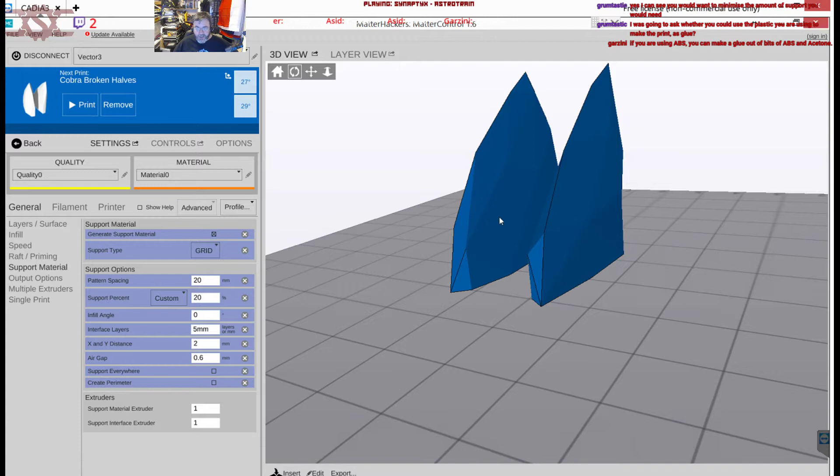Let's look at this method of printing — rather than using supports or having the model flat, we're looking at around an hour to print the original version, so we won't use support material since we don't need it here. We'll use a 25% infill, since that's the number that gave us the hour and a bit. Let's switch to layer view and generate.

60 minutes, so exactly an hour — roughly the same amount of filament, roughly the same mass. Obviously it's the same model, but it's quicker to print, which is interesting. So the method you use for orienting your model in the printer can save you time. Depending on the orientation of your print, the amount of infill used and how it's applied can also reduce the amount of filament you need.

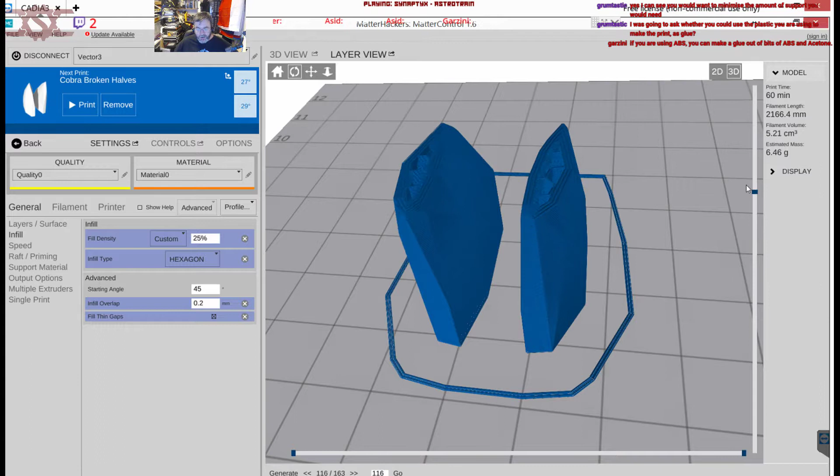So it's pretty cool — there you go, there's your triangles. As you can see, that helps — it prints off in a very nice way. What you can also see is that before, when the model was lying flat, all of your layers were ringed, put in big rings, so the top surface of your ship had all these rings.

I've been told PLA doesn't work with polystyrene cement. People have used poly cement, and I can attest to that myself — I've tried poly cement from model kits on PLA and it does not work, just falls straight off again. I've also tried plastic weld, which also just falls straight off. I've also tried 2-part epoxy resin — that also doesn't work. The only one I've had any luck with has been superglue, but even superglue isn't 100% stable. What I tend to do is...

I'll use thin sticks — drill a little hole and put a thin stick in, like the little pin vices you can get from places like Games Workshop, that sort of place.

Poly cement used for plexiglass? Well, that's not poly cement though, is it — that's polystyrene cement, meant for use on non-expanded polystyrene plastic. Plexiglass isn't polystyrene, is it? Plexiglass is something different. But it would depend on the formulation of the poly cement — if it's an industrial strength one, it might work.

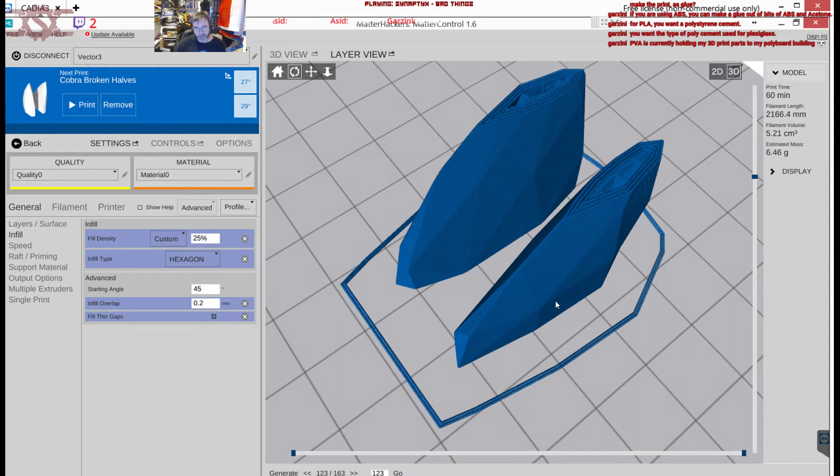But anyway, as I was saying, when you have the model flat with the top surface pointing straight up, your layers are going around the top of the ship, or car, or whatever it is, and you've got slightly less resolution on that axis - the x-axis if you like - than you do when you print it like this. Your vertical motion of the head is much finer, because the head can move at 0.1 millimeters each layer. The default is 0.2, but you can set it at 0.1, so you can have that degree of finesse on each layer, which makes your structure much more detailed. So yeah, that's 3D printing.

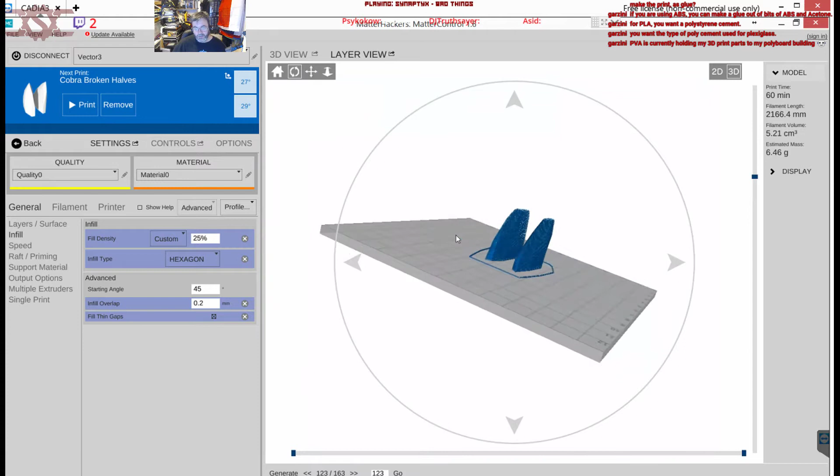Now I can't obviously show you what I'm going to do on the 3D printer itself. I'll save that for another session once I've got the 3D printer actually primed, and a camera that you can see on. But that's basically how it all works, people.

So, I'm pretty much done. There's not a lot else I can really show you in terms of how to put a model together. I'll talk about a few of the options you can have for 3D printing within this software.

So obviously you can set all the different layer heights and so on. As I said, there you've got 0.2. Your layer height can be as low as 0.1. And you've got all these parameter options. But I think the main thing is your infill, making your model a bit more hollow to save you plastic and time, because the more infill you have, the more plastic you fill it with, the longer it will take to print.

Speed is essentially how fast it goes. Now speed can be a factor in how accurate your model is and how quickly your plastic dries. So if you have a fan cooling system on your printer, you have to move your head slightly faster, or else the plastic cools as it comes out of the nozzle and is slightly drying by the time it hits the previous layer. So you have to make sure your filament temperature, your head speed and your ambient temperature are all well set.

Now at the minute, I'm looking at this, and it tells you the ambient temperatures - this is the extruder temperature, and that's the print bed temperature. Now they're not even switched on, they're literally just sitting in my room. In this office at the moment it is 30 degrees, and that's how hot the bed is, which is hot for a bed just sitting there as a bit of plastic on its own. That's because of the ridiculous bad ventilation in this room, which is bad for the plastic too, because the warmer the plastic gets, the more imperfections it gets and it doesn't remelt properly.

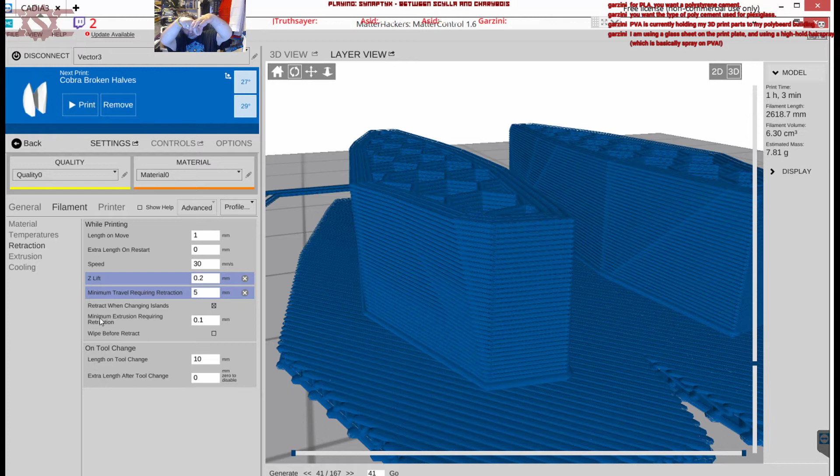It also retracts the plastic inside the head as well. So imagine the head, with plastic coming out here - which is looking a bit rude. When it's done laying it all out and it's moving, it'll retract the plastic back in so it doesn't drip. All the settings for that are there.

Extrusion is just how it takes the plastic out from the spool. And your cooling fan - now I don't have the cooling fan fitted to mine because I didn't bother putting it on, but I'm going to at some point, although blowing hot air around here probably isn't the greatest idea. But that's all it is - it's just how you keep the thing cool.

I've had mixed reports about what the cooling thing does. Some people say it's best to cool the model as it's printing, and some say cooling means your next layer doesn't stick as well, because you lose the tackiness of the previous layer if it's cooled down already. I don't know, your mileage may vary. That's for you to decide if you want to do 3D printing.

I'm using a glass sheet on the print plate with high-hold hairspray. I've thought about this glass sheet idea, and I've heard hairspray is a good idea. But I don't like the glass sheet, because I tend to flex my print plate when I'm trying to get stuff off it.

So this one has a little bit of bend in it. I had to put something on it anyway, because this print plate is crap. Look, it's got little dots in it, little holes. When you print something off you get this dotty hole texture all over it, little pins all over it. It's nice in some ways, because when I did that 3D printed Lego gun, the first two bits I printed were the main shell, and because they sat with their external side on the print plate, they had this dimpled texture, which actually was quite nice.

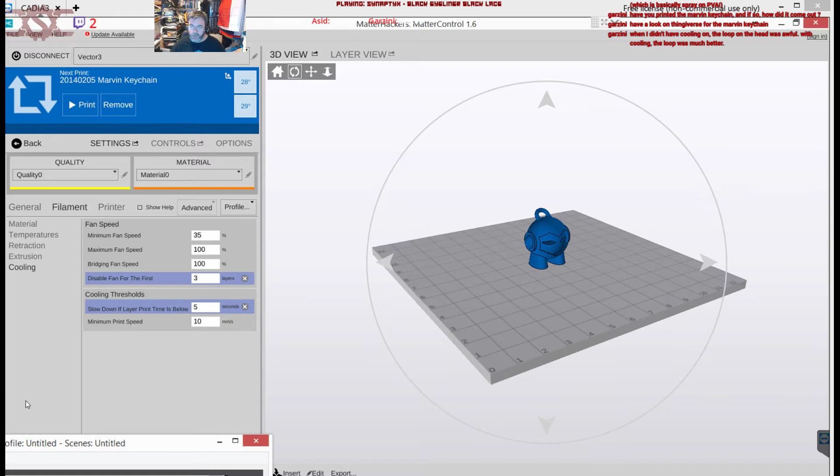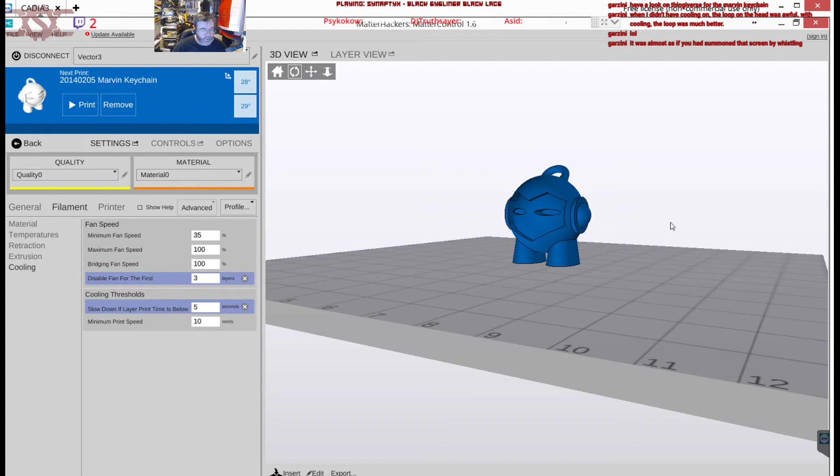So this might be printed without supports, so it looks like it could be a bit problematic. I don't know how that would print. The loop on the head was awful. See, that's the benefit — things hanging in space like that, because that's quite a high angle, about 45 degrees, so about the limit of what you're going to get. But cooling would help it cool on the way out of the nozzle so it wouldn't drip as much, so that would be feasible then.

I'm just blowing it. That's a cute little keyring, that. I like that, I might have a go printing that.

Yeah, I quite like that little keyring thing. The ears were a little bit teardrop shaped rather than round. I think it's small enough to give it a go without supports, to be honest. So that bit in between his legs, that might be workable. That's the only bit I'd really worry about, and as long as you're not going too hot, it shouldn't droop too much. And obviously you've got the eyes there.